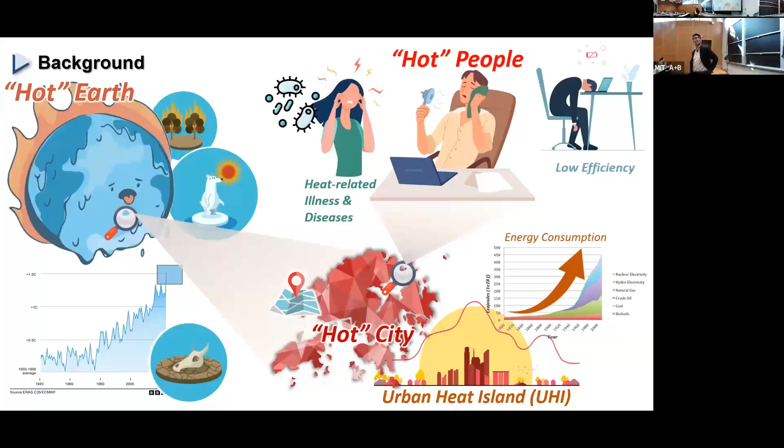So as we all know, our Earth is getting sick and the temperature keeps going up, and we're also suffering in some really uncomfortable cities. And for the individual person, some of us may suffer from heat-related illness, which will lead to lower efficiency, and at the end will cause health, economy, and environmental crises. So to solve this problem, particularly in Hong Kong, maybe some of you went to Hong Kong before.

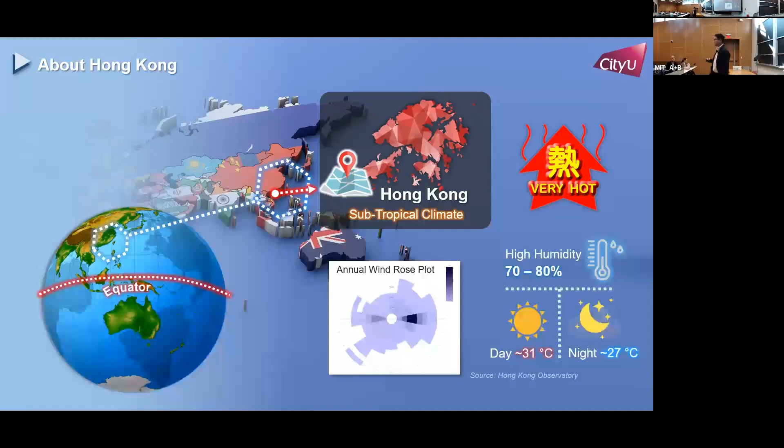Hong Kong typically has a subtropical climate, and we suffer very hot and humid summers. The temperature can go up to close to 37 degrees. The humidity is very high. We have a lot of buildings receiving a lot of energy, around 50,000 buildings together in a very dense area, about 263 square kilometers. So we are currently living in an extremely dense city. If you sum all the heights of the buildings in Hong Kong, it is around 40 times the height of Mount Everest. So we have a lot of buildings.

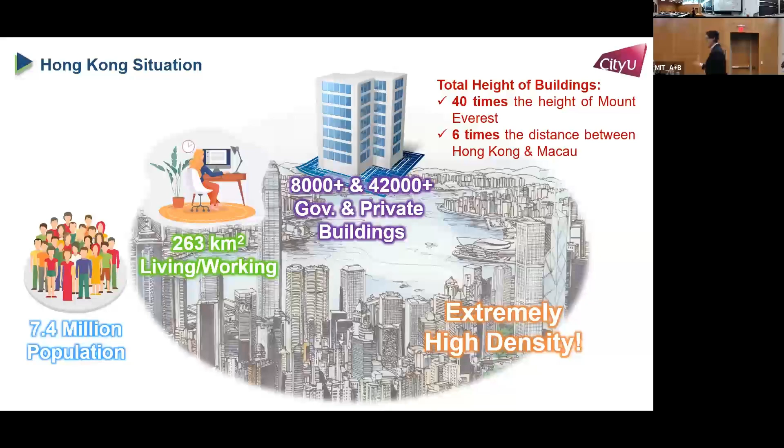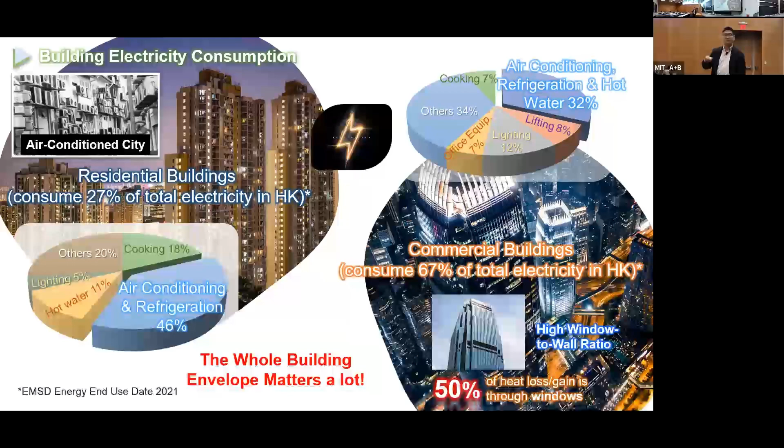So in Hong Kong, buildings consume more than 90% of total electricity. And from those 90%, air conditioning actually occupies the most. No matter for residential or commercial buildings, the energy consumption due to air conditioning is nearly 50%. This is typically due to the high window to wall ratios, particularly in commercial buildings.

So to solve those problems, I came up with an all-in-one building energy solution that lies in my research areas. The first one is what we call the thermochromic smart window, used in the transparent part of the building to mitigate the heat gain from the surroundings. And for the building envelope, that is the opaque parts, I propose to have radiative cooling for cooling purposes.

And then we also need to have a control system. We developed a model control scheme that controls the traditional HVAC system together with the new technologies like the smart window and radiative cooling. In this way, we can further save the energy of traditional air conditioning because we adopt new energy efficient technologies.

And then in the later part, some of my students and postdocs are working on building scale assessment, that is, simulation studies. If we integrate those new technologies like the smart window and radiative cooling into an existing building, with, for example, solar panels, what is the performance? We also provide very comprehensive building performance evaluations.

Finally, we not only look at the building itself. If we have a lot of buildings together in the community or in the city, how can those new technologies mitigate the urban impact? We often get some effective results from using radiative cooling at the community and city scale to mitigate the urban heat island effects. So now I'm going to first talk about the smart window part.

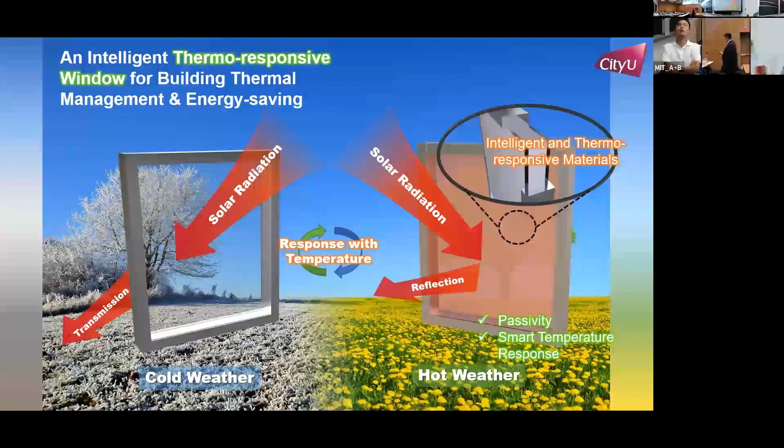That means when the temperature is low, the window is just like a normal glass window, allowing the solar radiation to get in. When the ambient temperature is high, the window will start to absorb part of the solar radiation. In this way, you can reduce the indoor air temperature, reducing the load on indoor cooling or heating.

So I have worked on the thermochromic smart window since 2018. When I came back from a research group to Hong Kong, I focused on VO2, and then later on got involved in perovskites. Most of the scientists doing perovskite are actually focused on perovskite solar cells, but I found that some of the organic perovskite materials also have a thermochromic effect. So I started to work on perovskite thermochromic materials and published different kinds of papers in Nature, Advanced Materials and so on. So I will present my research here in relation to the thermochromic perovskite materials.

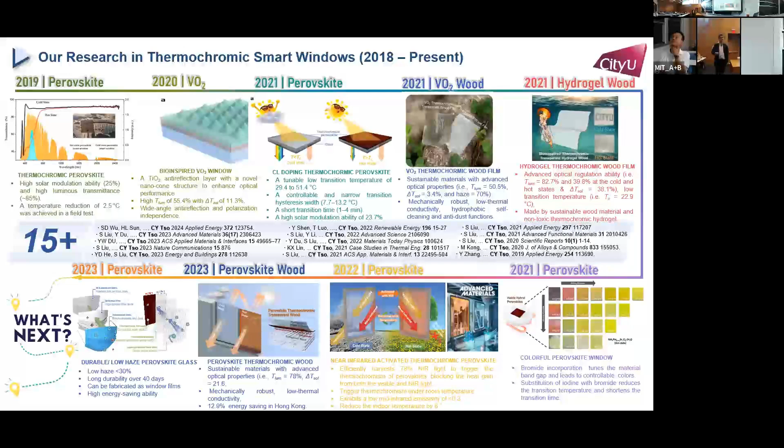We can also adjust the material composition. We can control the color of the material, and the temperature can also be controlled within about 25 and 45 degrees Celsius. And the whole transition process can be finished in a couple of minutes.

However, for this kind of perovskite material, there's a very fatal issue: in order to trigger the thermochromics, the humidity needs to be controlled within a very precise range, around 15% or even lower. So if we want to commercialize it, the only way is to put this perovskite material in a double glass window, such that we can control the humidity inside. But as a result, the installation and maintenance cost will be very high.

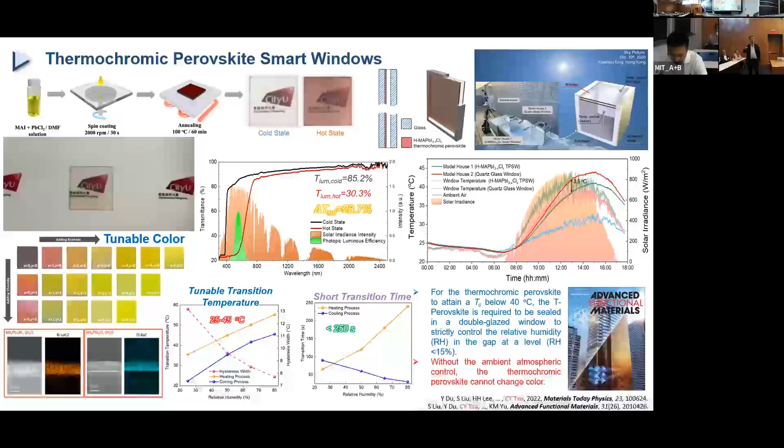So to solve this problem, we came up with the second perovskite smart window. We call it the near infrared active perovskite smart window, TPCL for short. We combine the CWO coating together with the thermochromic coating on the window, forming a layered window. In this way, the window starts to absorb radiation in the near infrared region. You can see that the last window still has a very high transmittance in the near infrared, but after adding the CWO, the near infrared region starts to absorb the radiation.

In this way, the material itself can absorb the radiation, even when the humidity is about 50–60%. So this solves the humidity problem of the perovskite material. You can see that even under 0.7 sun, the window temperature can reach about 40 degrees Celsius, triggering the transition temperature. And then you may argue that the window itself may be very hot after absorbing the near infrared.

So that's why we also add a low-E coating, so that the window itself will not emit secondary radiation to the indoor environment. You can see the emissivity in the mid infrared region of this TPCL window is about 27%, which is very low and close to low-E windows.

So we built 4 model houses. The first one is a normal glass window. The second one is the low-E window. The third one is the same window but without the low-E coating. The last one is the TPCL window. We conducted tests in the local Hong Kong climate, and we found the indoor air temperature in the model house is about 8 degrees Celsius lower than with the normal glass window. We can save at least 10% of energy consumption.

But for this kind of window, no matter the perovskite, even if you are talking about the perovskite solar cell, another issue is usually the stability and lifespan. So how to solve it? Typically for this perovskite material, the lifespan is around a couple of days, 2 or 3 days, and after that, the thermochromic effect disappears.

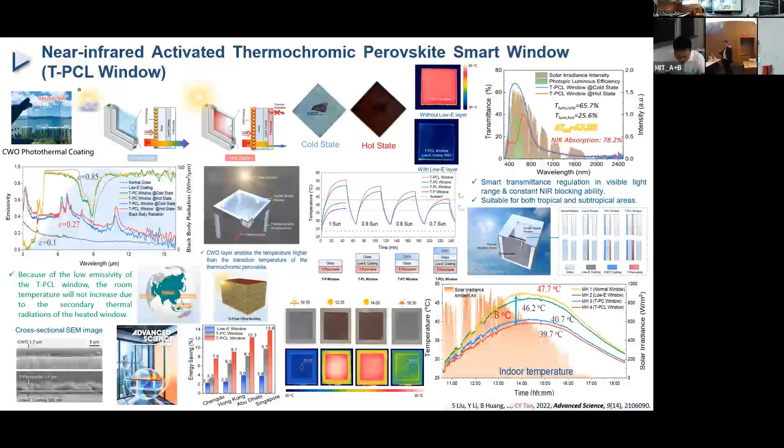So to solve this problem, our team recently published in Nature Communications an approach inspired by the face mask that we wore every day during the pandemic. Because the face mask has 3 layers. The outer layer actually repels the bacteria and allows a certain amount of air into our lungs.

So similarly, we also have 2 more layers. The outer layer is to repel the water droplet. The middle layer actually is to allow a certain vapor to transmit, because we need the water vapor in to react with the perovskite material such that perovskite can conduct the exchange. So we do not want to have water droplets. We indeed need to have some water vapor.

So in this way, we put up 2 extra coatings. One is PHPS coating. The other one on top of the PHPS coating is silicon dioxide nanoparticles. So in this way, we can achieve a very super hydrophobic surface with contact angle over 160 degrees. And you can see that no matter in the cold state or hot state, the water droplet is totally repelled. A small amount of water vapor can penetrate into the perovskite to trigger the thermochromics.

So in this way, we can find that this is a cold state, this is a hot state. The transmittance at cold state can still keep at about 80%, hot state at 30%, leading to about 24% solar modulation ability. Most importantly, the haze of the window is dramatically reduced. This is the previous common perovskite window with a high haze that we cannot see the object behind the window.

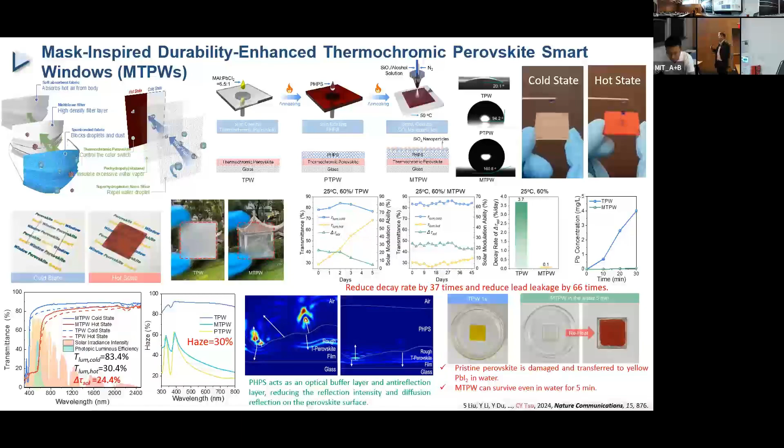So for the previous perovskite materials, you can see that after 1 day, the thermochromics actually totally disappear. And after 5 days, there's no thermochromic effect. However, after these 2 layers, we can extend the lifespan by up to 1 month. So this is one of the greatest achievements of our work, to identify how we can extend the lifespan of the perovskite material such that in the near future it can be put into commercial use.

And then perovskite on the other hand can generate electricity. So that's why we recently came out with the idea that this perovskite material can generate electricity at the hot state if we add some electrolyte and transport layers. And during the fabrication process, we found that if we use anti-solvent solution during the fabrication, we can further reduce the haze to 11, even lower than the previous one.

And the morphology of the window material is significantly enhanced. This is the SEM photo showing the very smooth morphology of the coating after using the anti-solvent method. The surface roughness is reduced to 7 nanometers. If we do not use the anti-solvent method, the previous roughness is about 220 nanometers. If we do not have a very plain morphology surface, even with some electrolyte, windows can hardly generate electricity. So that's why we need to solve the morphology.

Having solved the morphology, we added electrolyte and we can successfully demonstrate 2% power conversion efficiency at the hot state. I think this is already the record high power conversion efficiency for perovskite for window application so far. And we can achieve nearly 90% luminous transmittance at cold state and 19% at the hot state, leading to a record high solar modulation ability of about 31%.

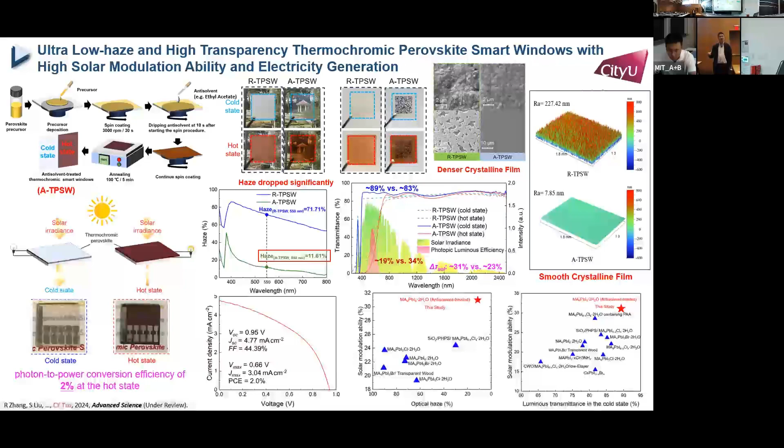This is the highest record in terms of solar modulation ability from common perovskite material. So you can see from these two figures, compared to all the previous perovskite materials for thermochromics, our work leads to the higher modulation ability and, of course, the highest luminous transmittance in the cold state.

So then for the whole big roof and the wall of the building, we would like to introduce passive radiative cooling, which is recently a very hot topic. Passive radiative cooling is inspired by nature. Why do Saharan silver ants survive in the Sahara? Because of their particular structure, which can strongly reflect solar radiation simultaneously with emitting heat radiation to the universe.

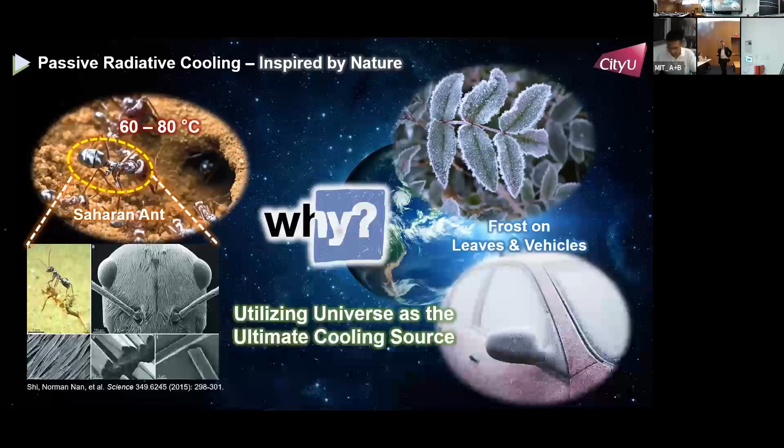So the working principle to achieve radiative cooling is very simple. First, during the daytime, we need to strongly reflect solar radiation from the sun. And then at 8 to 13 microns, we need to strongly emit the thermal radiation to the universe, where the temperature is near 0 Kelvin. So in this way, we can passively generate some cooling effect.

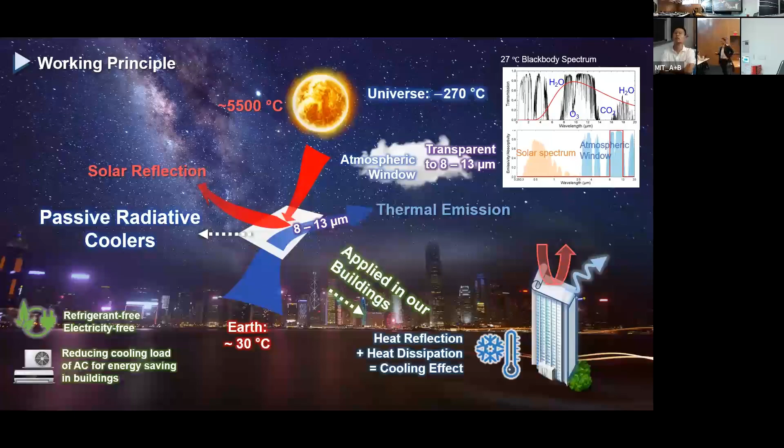And then the work actually I started when I was still at UC Berkeley working with my supervisor Professor Chris Dames there, and then came back to Hong Kong. I kept working on passive radiative cooling, but started from the photonic-based passive radiative cooler. And then later, because the photonic one is very expensive in terms of manufacturing and difficult to be in a larger scale, I moved to polymer and microchannel inorganic coatings.

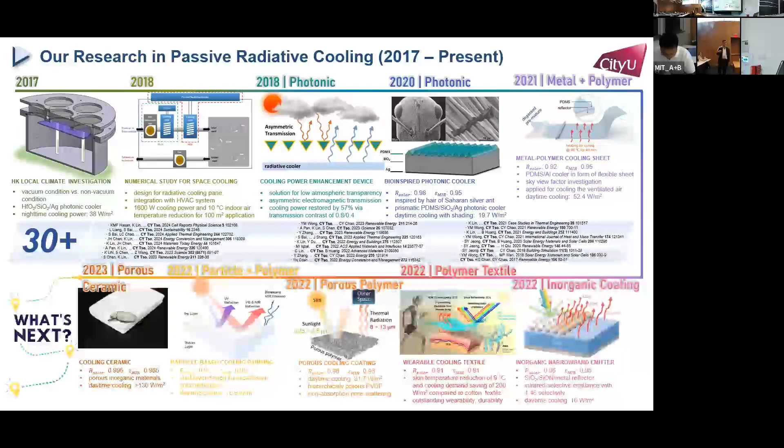And recently our work has been published in Science, where we can achieve solar reflectivity of 99.6%, which is a record solar reflectivity, and also the highest passive radiative cooling power, which has almost reached the theoretical maximum cooling power of about 140 watts per meter square. So in today's talk, I will spend more time talking about what we have in Science.

And so, the previous papers cover passive radiative cooling. You have the passive radiative cooling wall, passive radiative cooling tanks, etc. And I found that actually the facade and the building wall is not made by coatings, it is installed with a lot of small pieces of ceramic tiles. So that inspired me: we can build a ceramic tile that has a very high solar reflectivity and high emissivity.

So when we had this idea, we chose aluminum oxide particles, which is a metal oxide material. It's very abundant in the world and very cheap. And the reason why we like to use ceramic is because most of the passive radiative coolers built before actually used polymers.

As we know, for polymer, if we put it outdoors for like 1 year, it will have strong degradation. The polymer will first become yellow and then become brittle. So polymer material is difficult to sustain in the outdoor environment. If we use metal oxide, which is an inorganic material, typically we can solve the UV degradation problem. So that's why we have chosen aluminum oxide, and we have optimized the pore distribution and the size of the pores.

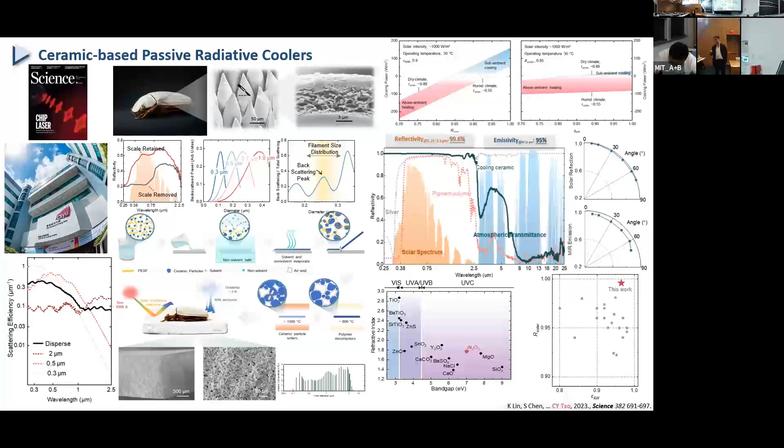We can achieve the highest 99.6% solar reflectivity with also very high emissivity in 8 to 13 micron, which is about 95%. And we have conducted a few tests in Hong Kong first, and we continuously monitored, and the cooling ceramic temperature itself is around 4 degrees Celsius lower than ambient temperature. Compared to commercial white tiles, we can achieve like 8 degrees Celsius lower.

And then we also measured the cooling power. We found that with almost ideal solar reflectivity, we achieved a cooling power of 134 to 140 watts per meter square, almost reaching the theoretical limit. And we also went to different cities to study the effect of various climate conditions on the cooling. No matter which city, including Boston, which we did 2 years ago, we can achieve sub-ambient cooling.

And then we built 2 separate model houses on the rooftop with about 50 square feet. Here we have more than 200 pieces of our small ceramic tiles made in our lab, compared to the commercial white tiles. From appearance, by our naked eye, there's no difference. And we installed the ceramic tiles to replace the rooftop.

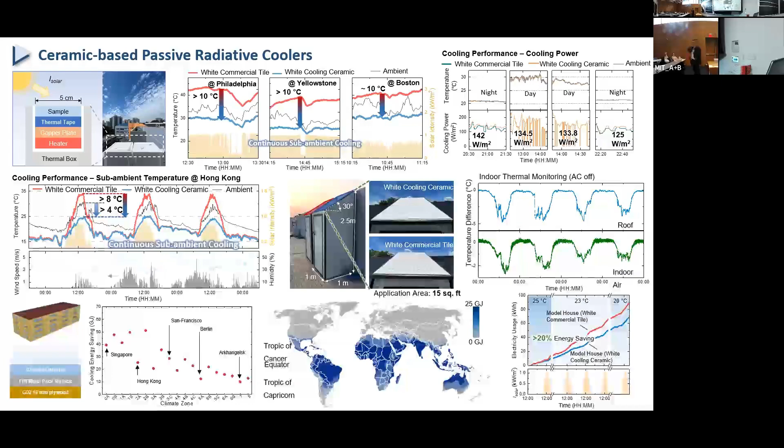Say for example, we set it at 23 degrees Celsius, which means when the indoor temperature is higher than 23, the air conditioner will switch on, and below 23 it will switch off. So in this way, in general, we can achieve about 20% electricity savings directly from the air conditioner. And this is one of the results in the paper. And then we can also demonstrate different colors. We demonstrate yellow, red, green, and black.

So we can show it in different shapes. This can actually replace the existing tiles in the market. And even for those colored ceramics, the reflectivity is at least 10 or 20% higher than the existing commercial color tile with the same color index. Our reflectivity is higher.

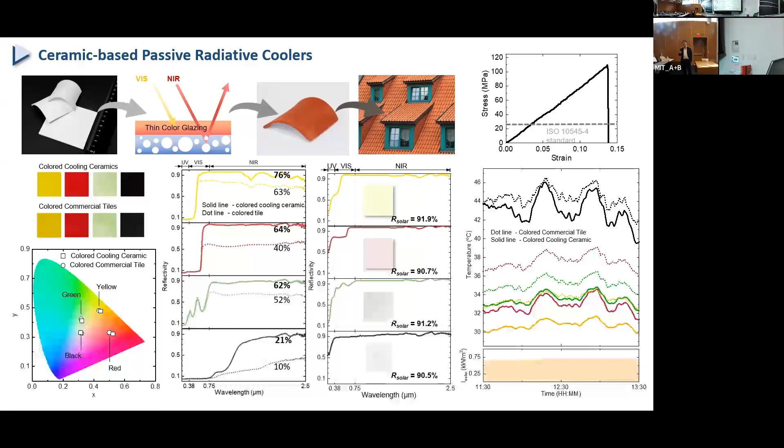And also in terms of dust resistance tests, we put it outdoors to see, if there is a lot of dust, whether the dust affects solar reflectivity. And we found that when we do the self-cleaning, the reflectivity will be recovered back to around 90%. So the dust will not make it fail.

And another spotlight of this paper, which is a collaboration with my colleague, Professor Wang Zuankai, is that we found that after adding a special layer of coating, the cooling ceramic becomes completely super hydrophilic and it can solve the problem of the Leidenfrost effect. So what is the Leidenfrost effect?

Typically during cooking, the pan is very hot. If you put some water on the very hot pan, the natural phenomenon is the water will jump on the hot surface like this. Because there exists an air layer between the droplet and the hot surface, it leads to less efficient cooling of the surface. So this problem is what we call the Leidenfrost effect.

And recently we are working on cooling power control for the passive radiative cooler. That's because, you know, if we utilize those coolers in some cold climate, like Boston in winter, it will be extremely cold. So in this way, we will have cooling penalties, which means in winter you will need to switch on the heater and provide extra heating energy. So this is the problem that we'd like to solve, and to see whether we can have cooling power control for the passive radiative cooler.

So we have developed a multiple-layer cooler. There's a top layer that can roll up and down depending on the solar intensity, and the bottom layer is the normal passive radiative cooler. So in summer, when the solar intensity is high, the material rolls up, so the bottom radiative cooler directly faces the sky to perform radiative cooling. In winter, with not very strong solar intensity, the top layer lays down and covers the bottom radiative cooler to perform solar absorption to keep the building warm.

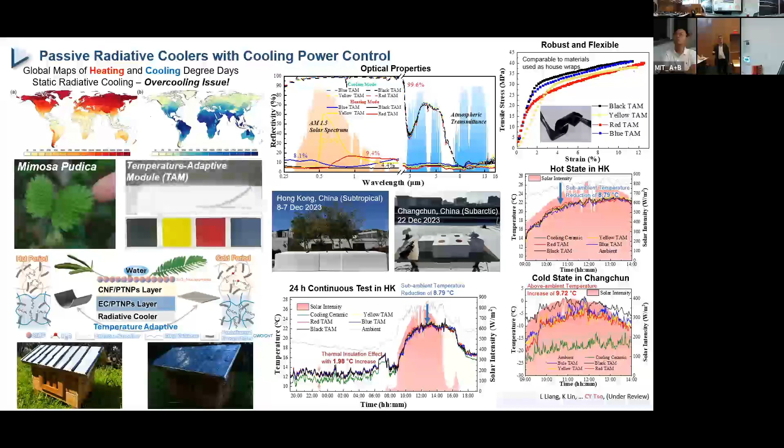So we have demonstrated this kind of coating is also flexible, and we have conducted a few tests in Hong Kong in summer showing we can reduce the temperature below ambient by about 9 degrees Celsius. But when we go to Changchun, a city in the northern part of China, the coating has a higher temperature than the ambient by about 9 degrees Celsius, which can perform the normal heating functions.

And then the third part, due to the time issue, briefly: our team is also working on model predictive control, which is an AI control system to integrate the passive materials together with the existing central air conditioning system. We know that if we control the envelope to absorb less energy or emit more energy to the universe, the indoor air conditioning system may reduce the heating and cooling. So we need to have control between the new system and the air conditioning system.

And then we'd like to talk about scale assessment. So this is another part of my research, working on how to utilize those kinds of renewable materials and hydrogel based smart windows. In the existing window, for example, we have different kinds of window structures like single glaze, double glaze, vacuum glaze, ventilation glaze. If we put those new materials into this kind of structure, it is still unknown how they perform. So we have conducted a model, an energy co-simulation model, to estimate the thermal comfort, energy usage, and the visual comfort after using those materials.

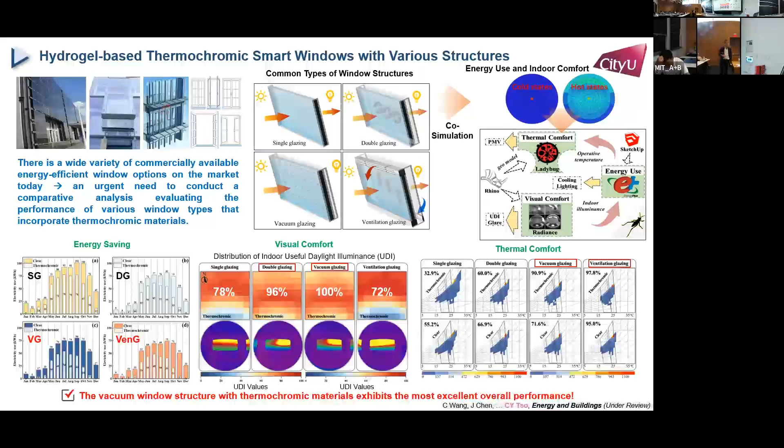And then the result shows that the vacuum windows can show the highest energy saving, the best visual comfort, and also the best thermal comfort. So this is another study that we are working on. And then we are also working on radiative cooling combined with some traditional phase changing material, combined with paraffin wax, because the existing passive phase changing material rooftop lacks significant cooling capacity, and the performance may be even weaker when the PCM is fully melted.

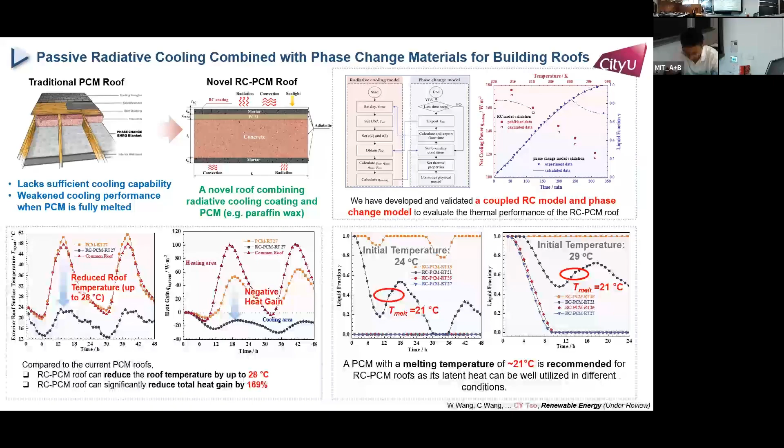So we propose to combine the PCM together with passive radiative cooling on top of the PCM in building applications. We have developed a radiative cooling and phase changing material model, and the model is validated by experiment, and we found that with this novel radiative cooling PCM roof, we can reduce temperature by 28 degrees Celsius, reducing total heat gain by about 170%. And the best melting temperature of the phase changing material should be optimized at about 21 degrees Celsius in Hong Kong's climate.

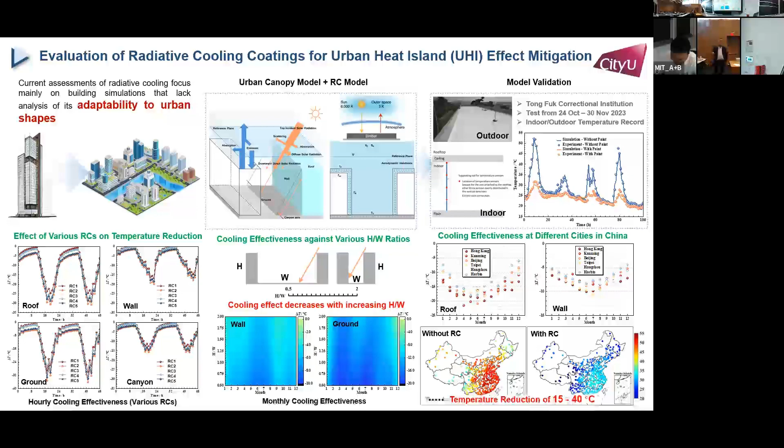If two buildings are nearby and we use radiative cooling, the effect will not be that significant because some of the sunlight will be blocked by the building nearby. So that's why if we have a higher height to width ratio, the cooling effect will be reduced. And we have also applied the model to different cities across China, to see if the eastern part of China utilizes radiative cooling, the city's temperature can be reduced by at least 15 to 40 degrees Celsius compared to cities without radiative cooling.

So finally, I would like to spend maybe 1 or 2 minutes to talk about knowledge transfer of the research from my radiative cooler to society, how we impact the society and the world. I co-founded a company called i2Cool 2 years ago, and we have raised funding of more than 18 million US dollars within 2 years. And in the first half year of 2024, we have already got 8 million US dollars revenue selling radiative cooling paint to different scenarios.

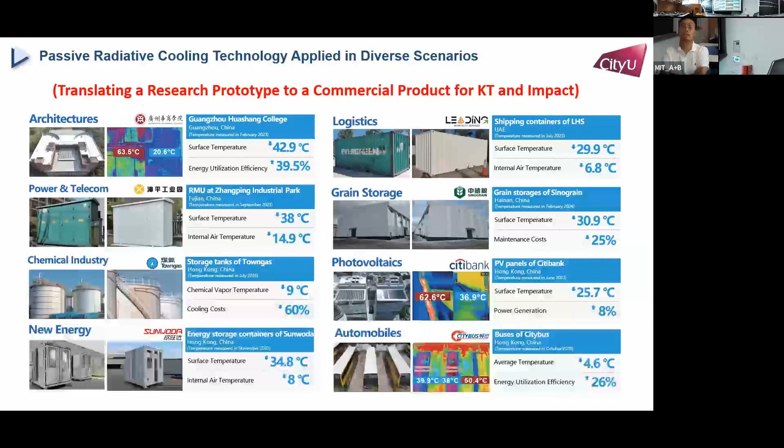The payback period is about 1 year after a couple of months of trial testing. And we have already sold different products in different parts of the city. Maybe the important one is Dubai Mall, which is the largest shopping mall. The next time you go to visit Dubai, the shopping mall there already has put our cooling coating, and it can reduce more than 40 degrees Celsius temperature, because you know Dubai is suffering very high temperature throughout the year.

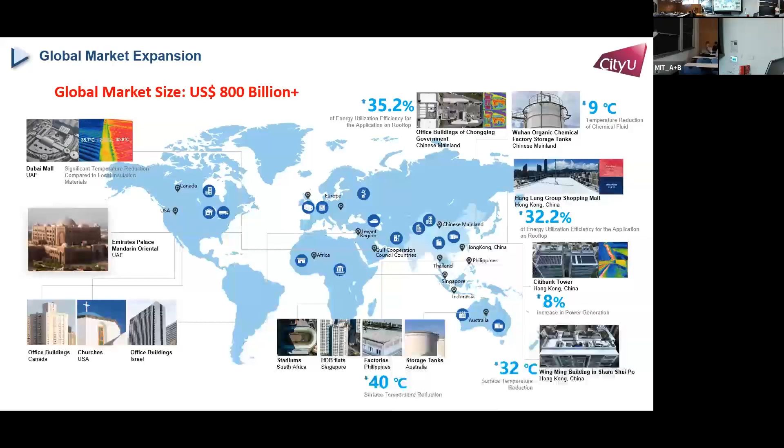And also we have applied the coating in different GCC countries. So this is some media reporting my works.

And finally, I would like to thank my teams. My team is over 100 students, postdocs and RAs, and also my collaborators, including Beijing, Tsinghua University, NTU, and also the Polytechnic universities. Without them, I think my research works would be difficult to be conducted in such a way.